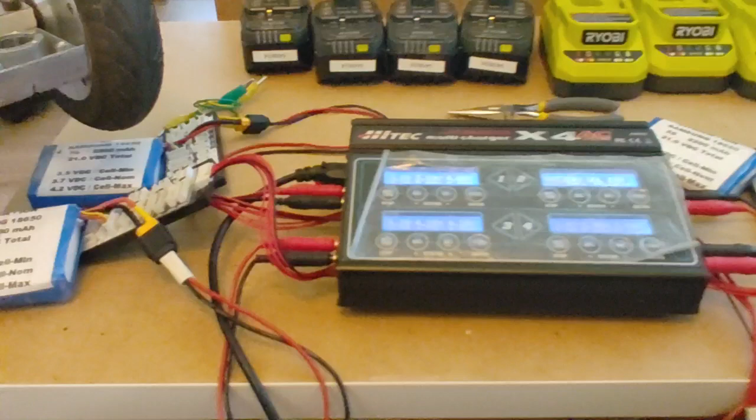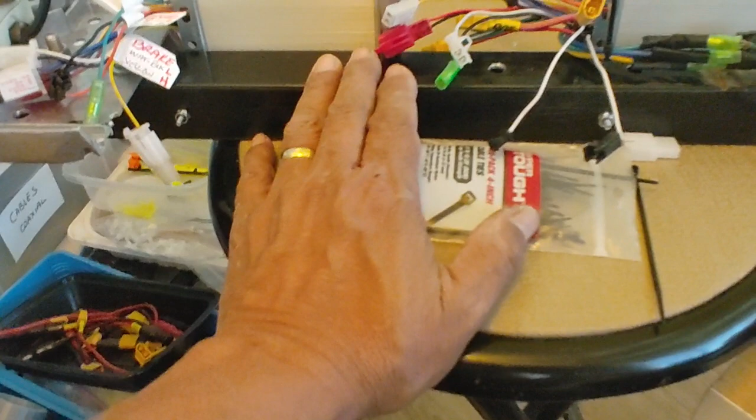And right now, what I'm doing is I'm working on this. Actually, this is what I want to talk about. I'm working on the drive system for this go kart that I've been working on lately. This go kart is made with this 1.5 inch square steel tubing. This is fence post material that you can buy at Home Depot.

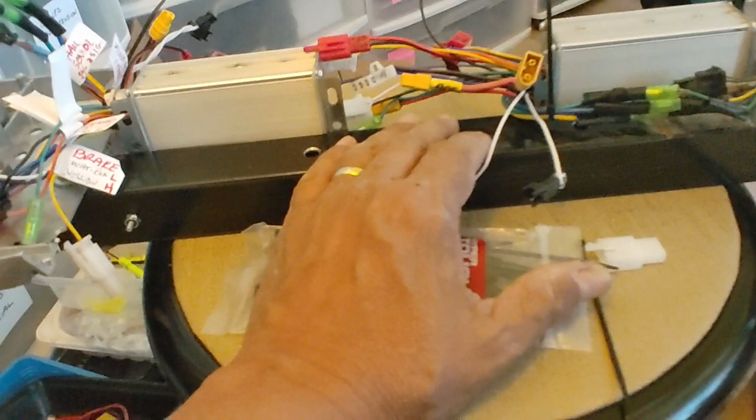But anyway, I mounted the controllers. These are brushless motor controllers, the same ones I had on the original go-kart that I made with the perforated telescopic steel tubing in the smaller version, kind of similar to this one here, but smaller. I did that, I don't know, 5 years ago maybe. Go look at those videos if you're interested in seeing what that looks like. They're all on my YouTube channel.

But I basically took the motors. They were joined together, very similar to that other one that's right there. That's another one. I do these things for fun, and so I buy these things inexpensively when I come across them, just to have them, so that when the creative juices kick in, I can build things like that. And here's another scooter right there.

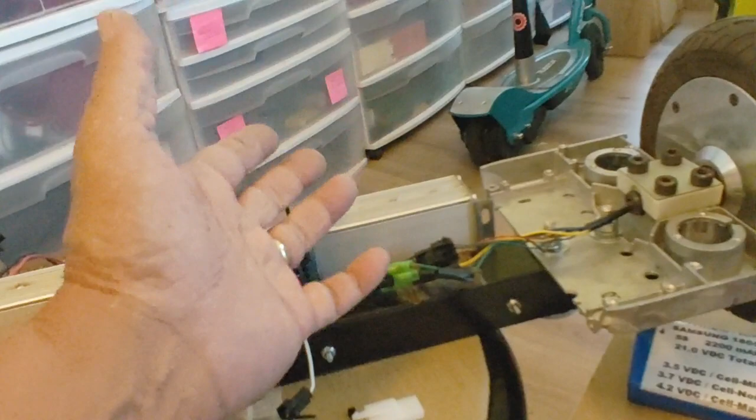And these are all things that I don't pay full price for, so that's why I have so many of these things, because there's so many people that get rid of these just because they can't charge the batteries, or they can't replace the batteries. It's more trouble to replace the batteries. You got to have the tools, and many people just don't care for that, and so they get rid of these things. It's a shame, and sometimes all it needs is just batteries, especially with these guys here.

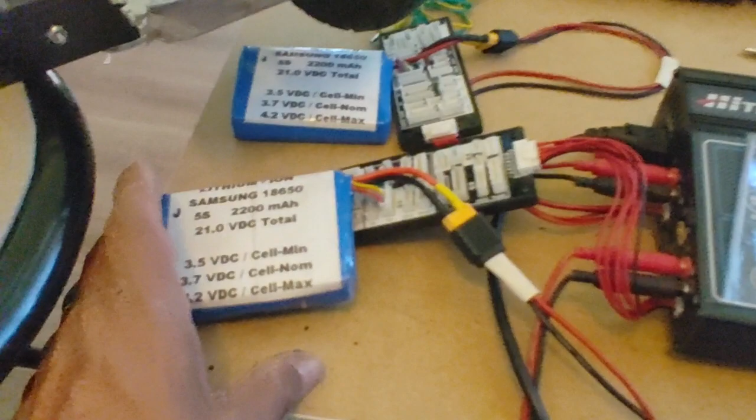These are a little more difficult because you got to get in the hoverboard, you got to take it apart, and you got to remove the batteries, and when those battery controllers go bad, you can still revive those batteries by charging them using a charger such as this one here. And I love this charger, by the way. And so I'm charging those batteries. That's exactly what I'm talking about.

These are batteries that came off these guys here, the hoverboards that I bought fairly inexpensive. I think I paid $10 for the cheapest one. And then when I brought it home, all I needed was to dismantle the battery pack, make my own battery pack, and charge them with a balancing connector, so that each cell gets charged individually.

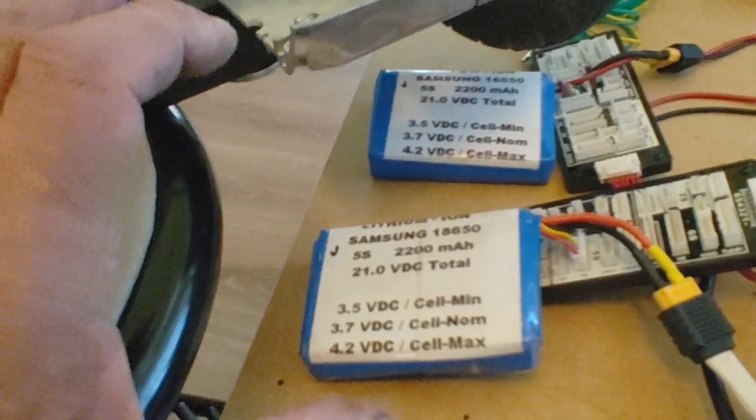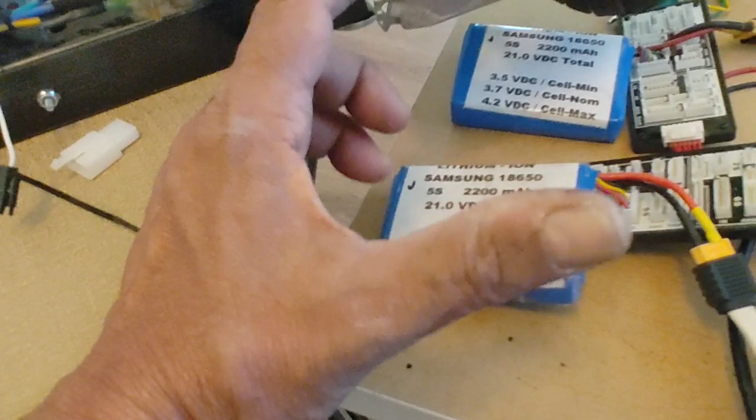I don't like the chargers that come with these packs right here. They give you the whole pack, and then they have one charger, an electronic circuit that fits on top. When those go bad, forget it. You're not going to be able to do anything. This is much better here, having a balancing lead or connector, so that each cell is charged independently. And this is where this comes in. A charger like this is excellent for doing this.

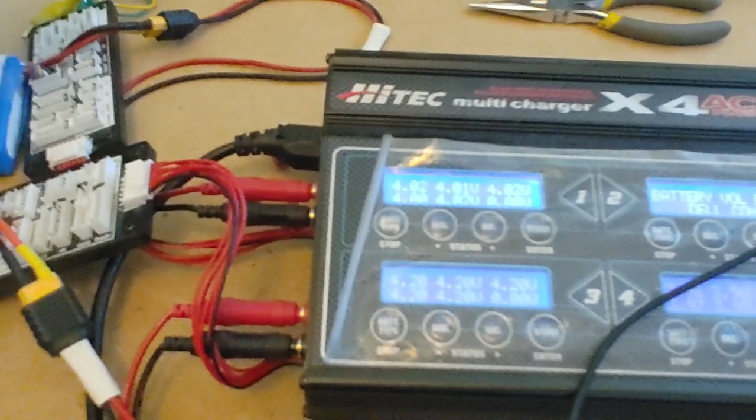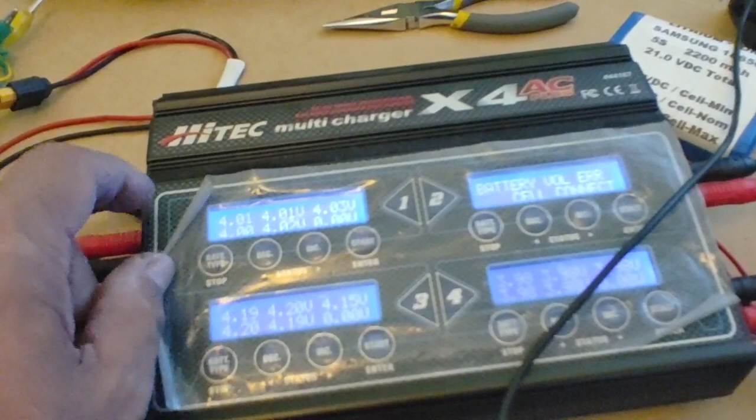This is basically just 4 chargers in one unit here, and it's all driven by AC current, which is really nice. Or you can use DC current if you use it at the field. Unfortunately I was trying to buy another one, but I did not find one of these for sale recently. Maybe I haven't looked hard enough, because people who buy these things tend to keep them, just like I did.

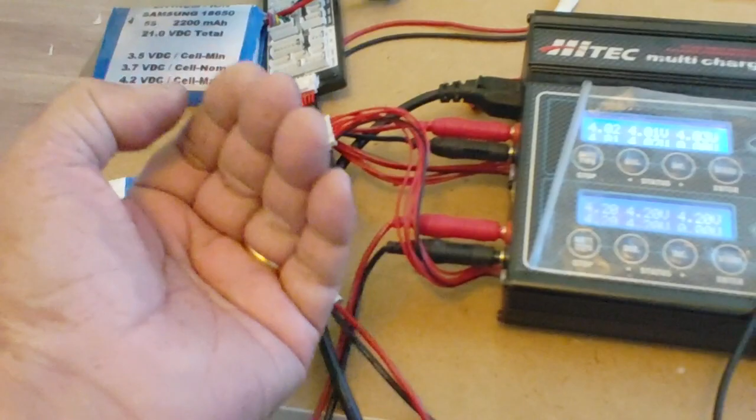This one went bad on me twice, because I did something stupid while I was charging a different type of battery, and I was kind of trying to get it started. And when you do that, there's a surge of current that happens when you're trying to revive. I think I was trying to revive a NiCad, or nickel metal hydride, and when I was doing that using this channel right here, I blew the MOSFETs. But I went in there and I replaced the MOSFETs. It's not a big deal for me. I did reach out to the company. They wanted to charge me almost as much as a new charger.

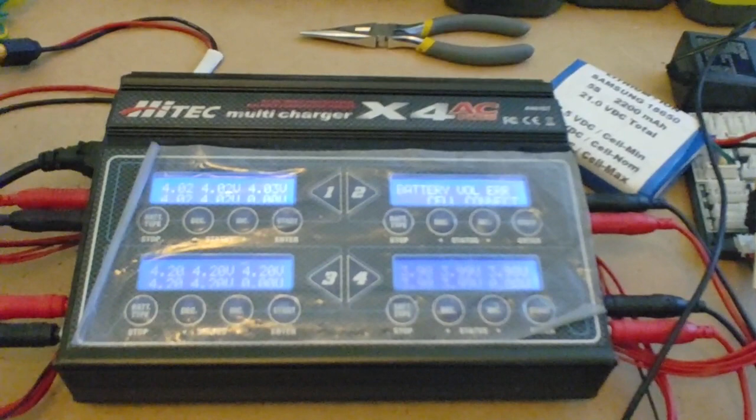It's typically the case when you try to send things to get them fixed. And that's why people throw away things, and then they buy new ones. It's a shame that we have that system. To this day, there's a lot of waste.

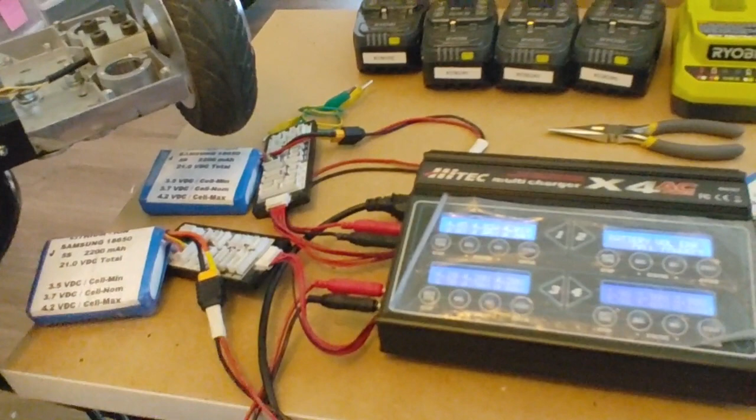And I, you know, I dislike wasting things. That's the reason why I also buy these things, to make projects like this, because I like to repurpose things. I like to recycle things. It just bothers me when I see so many things that could be reused, with a little knowledge and skill.

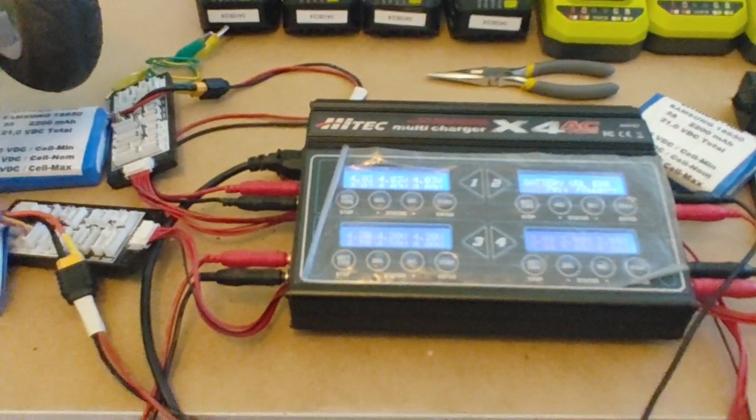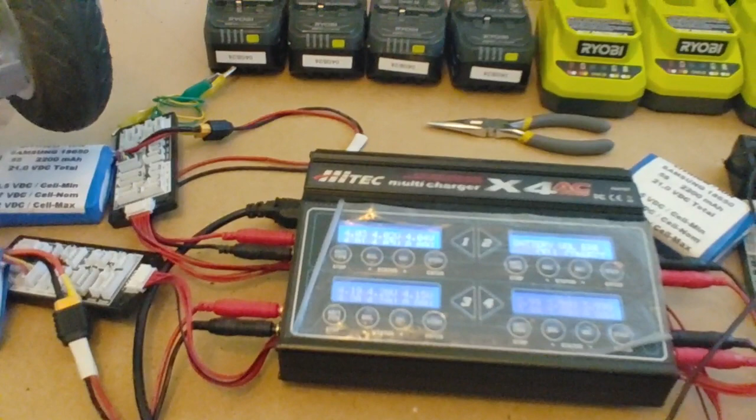Fortunately, I'm one of those people that can do a lot of these things by myself, with a little knowledge and skills, like I said. There are other people out there, and kudos if you're one of those people that likes to tinker and take things apart and repurpose things. I'm rooting for you, because I'm one of those. Anyway, so

this is the assembly. Like I said, I took apart my original go-kart with the telescopic tubing. I separated this. Actually, I cut this on my bandsaw, and I separated these so that it retains just the mounting point here. Now I could have gone with cuts like this and like this just to remove this extra material here, but I didn't want to do that.

I'm gonna have to think about that and see if I can still get away with that, because these things are bothering me. The fact that they stick out and they take away from the aesthetics of the whole cart. I'm trying to keep everything clean and aesthetically pleasing. So the reason I kept this piece like that is because I wanted to maintain the rigidity that this whole section provides, because of these extra walls it has. It's kind of like a framework to support this block right here.

If I were to remove this right here, let's see. The pressure points are right there, and at the bolts right here. So I may not need this. I may be able to just cut this off and keep it clean. The other reason I retained this is because it has these mounting posts here for the covers. I'm probably going to have to retain that, or maybe just cut around here and maintain that section for the mounting for the covers.

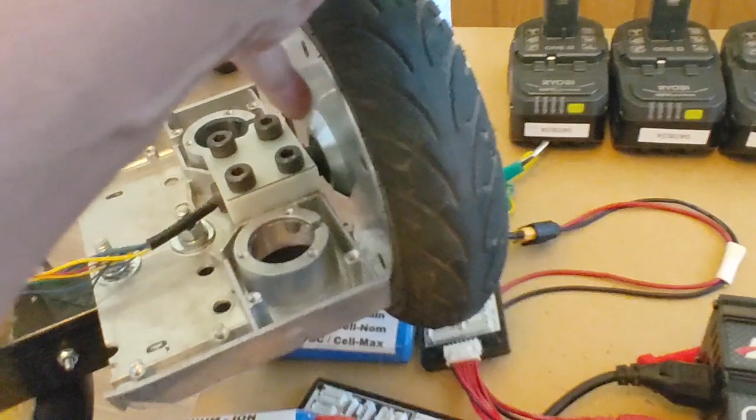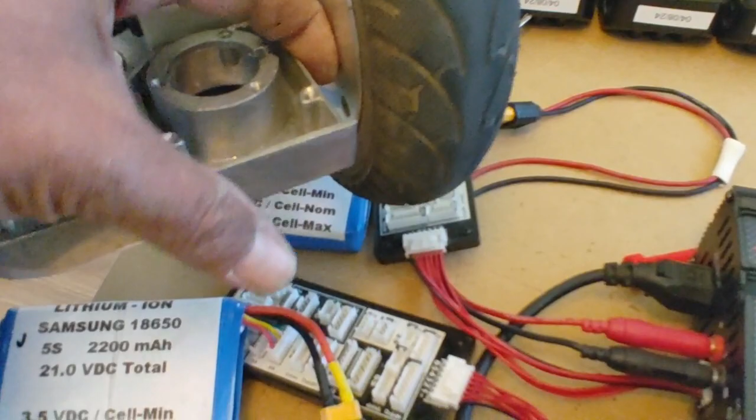So I also cleaned up the covers. I removed all the plastic except just a cover for the wheel, as a safety measure to prevent anybody from sticking their fingers in there, because that happened to me. On my first go-kart, it wasn't on, but I accidentally spun the wheel and caught my finger, and it hurt, and you can get seriously hurt if this is fully running. So that's the purpose of those covers, and that's why I kept this like this.

But I may come back and rethink this and maybe just cut away this extra section, because I'm not using this, and it's kind of ugly that these things are sticking out. I may reinforce the supports here a little further with some wider washers, to provide additional support, because when the weight of the person is here, most of the stress is going to be taken up by these two bolts right here in this plate. Not so much right here, but where this is mounting to.

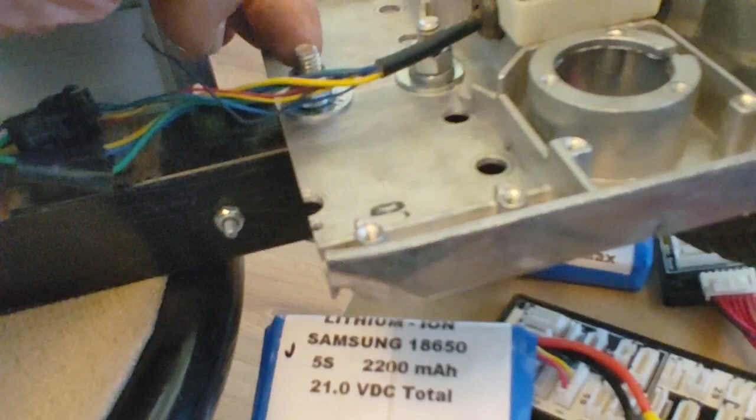Unfortunately, I couldn't mount four screws here, because this tubing is only 1.5 inches wide. I guess I could have done it with smaller bolts, but smaller bolts are really not going to buy any more than what these 5/16 bolts are doing here. So I'm just going to spread the load with washers, and I think that should allow me to cut this section right here and keep it nice and clean.

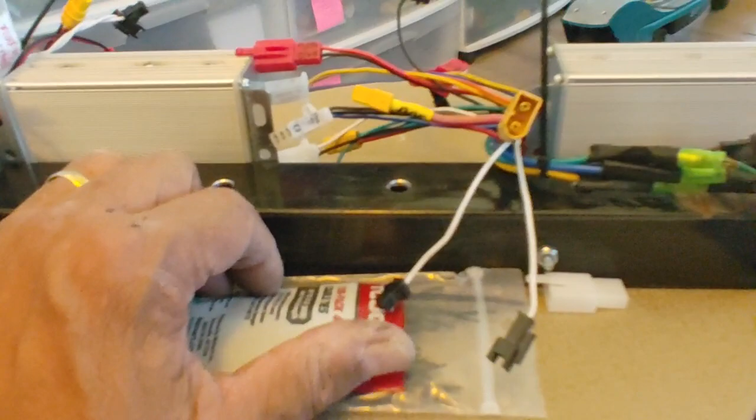Okay, so that's mechanical stuff, aesthetical stuff. Electronics controllers, they're still working just fine. There's so many wires here. When I first got these controllers, it was like, oh my god, this is like alien stuff, because there were no instructions, like, well, where do I go here, aside from the obvious, which are the motors, three leads here, and the sensor connectors, pretty much obvious, and the power, because of the thicker wires, and the key, the starter.

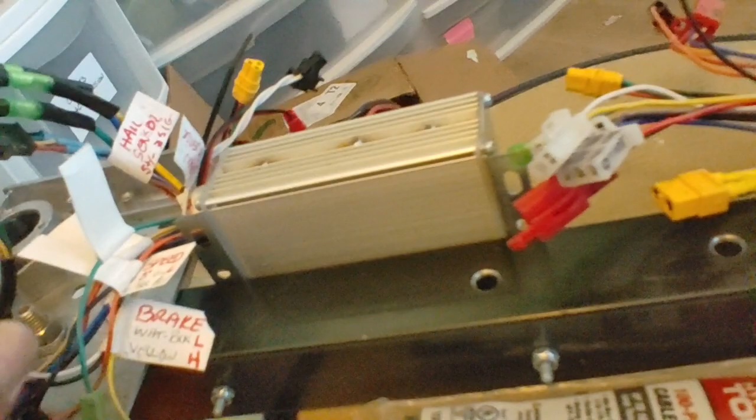But all these other connections, like, well, what is what here? So I did a drawing and I traced it, and that's why I have these tags here, which I'm going to take out once I get my schematic cleaned up a little bit. I may even put a schematic right here just so I can have the schematic on the unit itself.

I want to do that from the point of view that my dad used to work on electronics when I was growing up, and one of the reasons I went to school to learn electronics is because of my dad. I think subconsciously that was in my mind, because my dad was always repairing electronic stuff. Back in those days, they used vacuum tubes, and I remember my dad used to go buy parts from Radio Shack, I think it was Radio Shack.

They used to have a tester, these boxy looking machines or stands where you could go and test all these tubes, and that's how you tested your tubes, and that's how you bought tubes. So it was an interesting time to be around. And I grew up looking at my dad do all that type of work, repairing things.

A good portion of the equipment that my dad worked on, mostly radios and washing machines, stuff like that, had the schematic pasted on the inside of the device itself, and so it was great because you have the schematic, you have the map there, which is the way these things should be. These controllers should have a map.

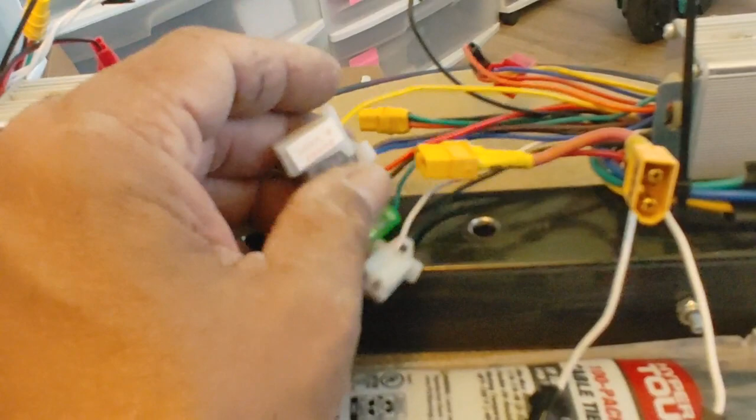Chinese is very hard to make some sense out of, because it doesn't use regular letters. It's more symbology, the way Chinese is written. So what I'm trying to say is, if it was in French or Italian or even German, you could still make out some of the words, because they're all derived from Latin. But Chinese is a different world. But I managed to decipher all the stuff, and I have markings right here. All the markings are there, but I also did it on this one over here.

So that's one of the things I am going to do. The schematic, I'm going to put it right here, so I have that. I'll probably laminate it so it doesn't get ruined with water, or not so much water, because I don't run these things when it's raining, or leave this outside when it's wet, just to protect the project, the go-kart. So that's one of the things I'm going to do.

What I'm doing this time is I'm making all this cleaner. When I did my first go-kart, I was more concerned with getting it running than tidying it up and making it really clean. And so some of these connectors, the way I did it, for example, where's that connector? For example, my throttle control and key, which is the on-off switch. I did it like this. This one is the key, and this one is the throttle control.

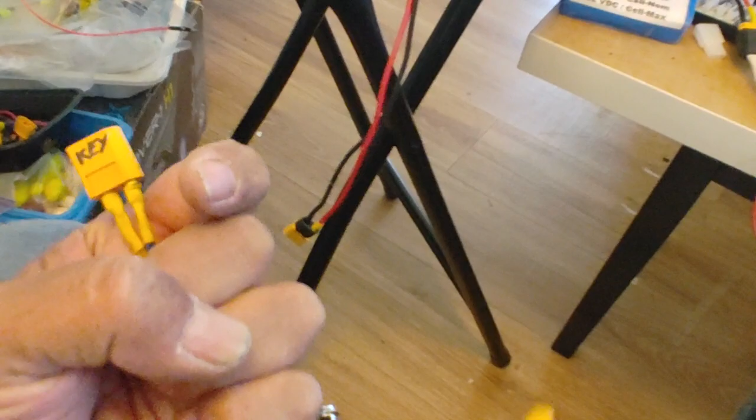So I did two of these that are attached in kind of a Y setup right here. What I should have done here is just have one of these here, one for the key, and one for the throttle, right?

And then the throttle from both of these should be parallel together, so that I can feed the signals to both of them at the same time. I do have the same setup here, but I put the Y right here, and so this I'm going to clean up. I'm going to just have one here and do that Y on this one right here, so both are parallel, and then they have one connector that matches with this one here. So that's what I'm doing with not just the throttle.

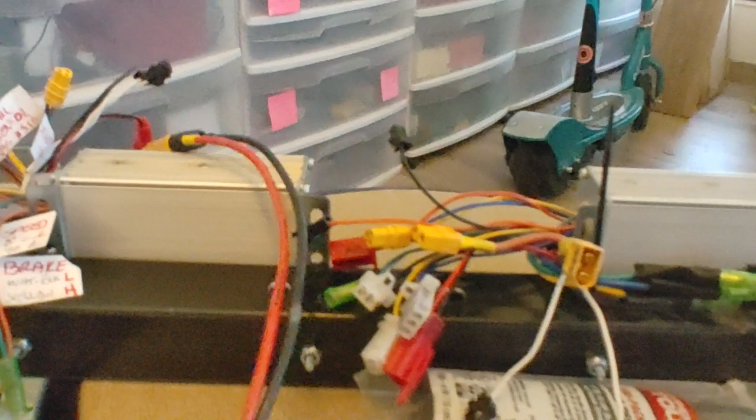The other thing this doesn't have is fusing. So I'm going to introduce fusing, and I'm going to just clean up, like I was saying, some of these. I'm going to make a harness for all these things. There's so many different connectors here. These should all be similar connectors, like these connectors that I use. That's the reason why I was using these as well. These three-prong connectors, just to keep everything kind of matching, similar to this.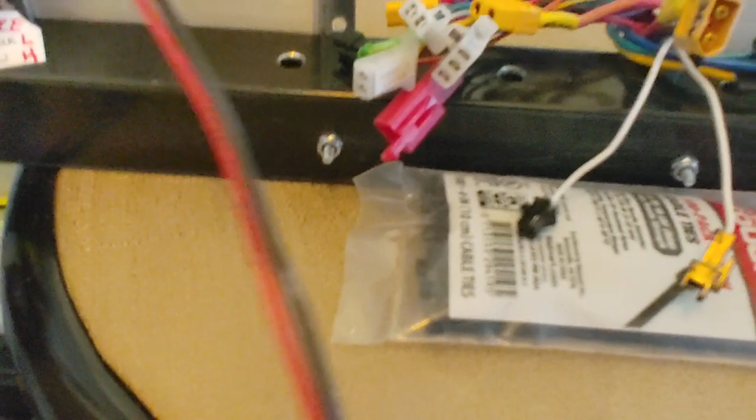There's no reason to go with all these. I mean, they could have done it with all these connectors like that. Pretty much everything. I guess it's done that way, but they're different colors, I guess. With a schematic, you don't need colors. You just need a connector in plain nylon white. That would have been a lot cleaner. Okay, so

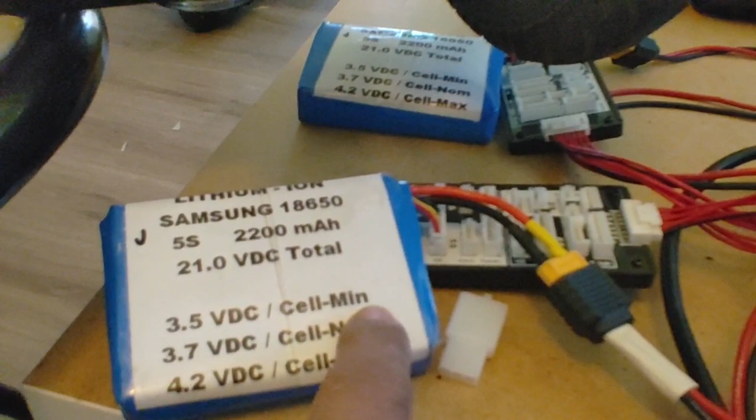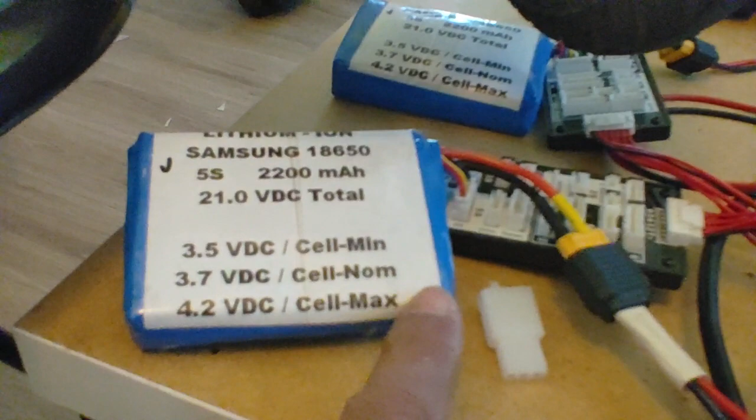this video is about this, and I'll talk a little bit about the batteries that I'm using right here. These are the original batteries that I used on my original go-kart, the one that I did with the telescopic perforated tubing, and I'm recharging these. I have 3 of these. One of these went bad. One of the cells went bad, so I have to take it apart and redo these things. But I do have some other packs in the works and in assembly, and these come from these guys right here. They're just pulled out, ripped apart, and individually reassembled as 5S packs, which make up a total of 21 volts.

I could go to 6 cells here. This charger will do six cells. See, this is doing 5, but it has up to 6 cells, and I can increase the voltage here, but that's going to increase the voltage to 24. Right now I'm running this fully charged at about 40. Let me see, what's my voltage here? I wrote it down here. 21 volts total.

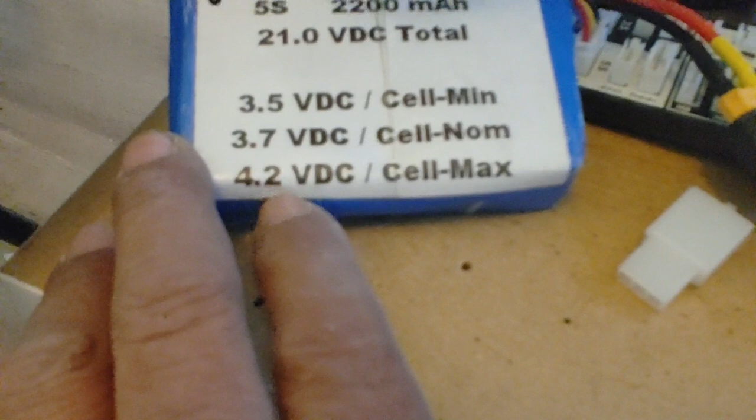Okay, so the nominal voltage is 3.7, of course, because these are lithium ions. Cell max is 4.2 volts. So at 4.2 volts times 5, that's about 21. Yeah, I'm running at about 40 volts in series, because I use these in series. And the reason I made 4 is that I was going to use 2 in series and 2 in parallel, just to double up on

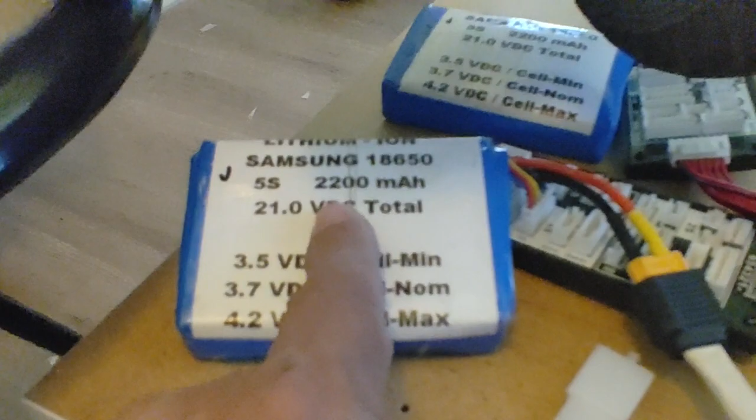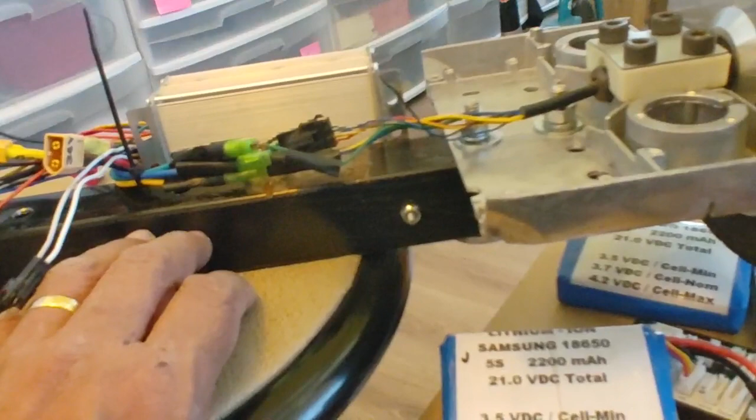the current rating, which right now is 2200 milliamps, which is 2.2 amps, is what these provide. With 2 of them in parallel, that gives me 4.4 amps. 4.4 amps on the original go-kart was going to give me a good 20, maybe 30-minute runtime. With 2 of these, it just gives me about 15-minute runtime, and that's at the 2.2 amp capacity. At twice that much, it doubles the running time. So that's the way I did this.

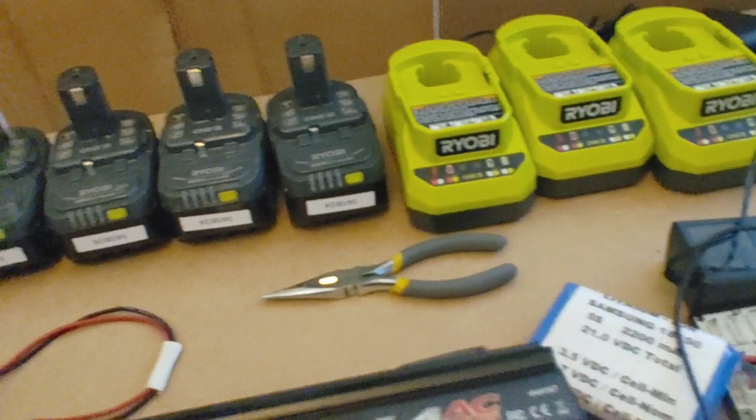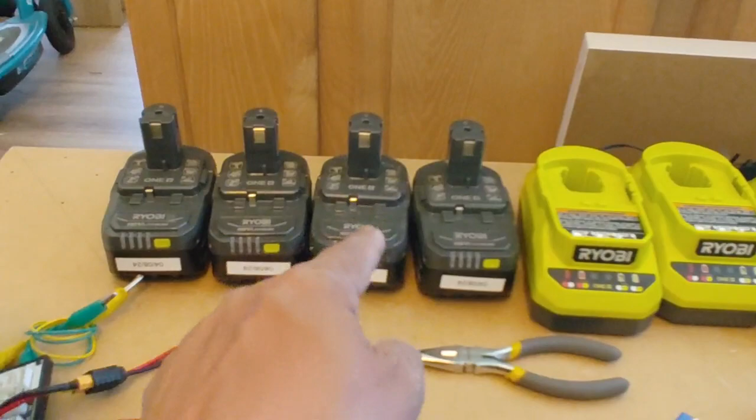I also have these Ryobis that you see here that I've been charging, that I use on those. I don't have that scooter with me, but I do have one that's adapted with the sockets to use these batteries. My racing go-kart that I did with the EMT tubing and maker pipe connectors, that one has those batteries that I run. 2 of those 18 volt Ryobis, 36 volts.

This runs a little more power at 42 volts, in series, delivering to each one of these controllers. I think these are rated at 36. Let me see. They do have markings here on these controllers, and I really like the way they laser cut the markings there. This has 36 to 48 volts, so yeah, it is able to handle 48 volts maximum.

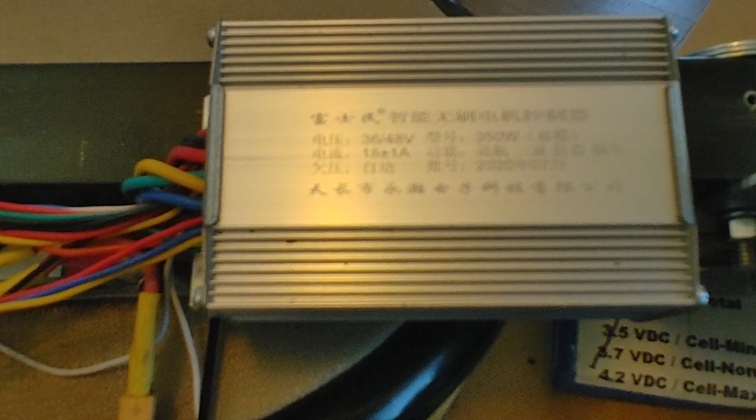18 plus minus 1 amp, 350 watts. So 350 watts per channel, or per motor. That's 350 watts times 2. That's 700 watts, which is plenty to push... I'm about 180 pounds, so it pushes my weight. And I've had people that are heavier than me sit on the original go-kart that I did with these scooter wheels, or hoverboard motors, and it pushes that weight just fine.

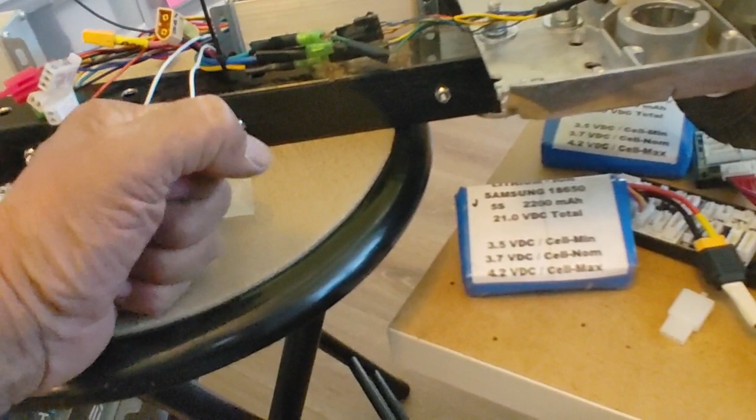700 watts. 1,000 watts would be better for my electric go-kart, the racing one. That one uses the same motors again. That one could use 2,000 watts because it's just a heavier frame, and so it's moving more, not just the pilot weight, but the mass of the structure, the go-kart. So on that one, I'm a little bit underpowered, I noticed, but it moves you around. If you're on flat terrain, you have no problem. It's just going up a little hill, it has a little hard time. This one doesn't have so much of a hard time moving uphill with a lighter airframe.

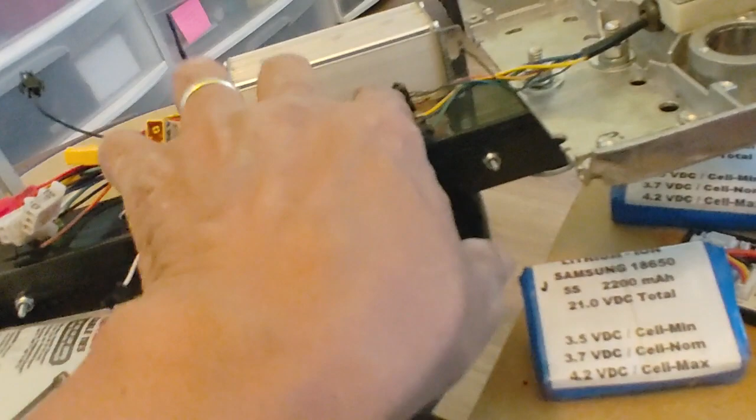But it's 700 watts. It's what I'm delivering here, what I'm using with these motors. I could gear this, but that introduces more mechanical complexity, and so I don't want to do that. I just want to keep it direct drive. And these things did not cost me more than, like I said, I think I paid for this particular one, the hoverboard, $10. And all I had to do is just gut out all the original electronics.

I could have used those, but it's a lot easier to buy these controllers. These are like $25-$30. Buy two of these controllers and just reconnect everything the way you see it, and it looks clean. And if one of these goes bad, you just pull that out, put a new one there, you're done. You don't have to mess with the electronics that are kind of on that one.

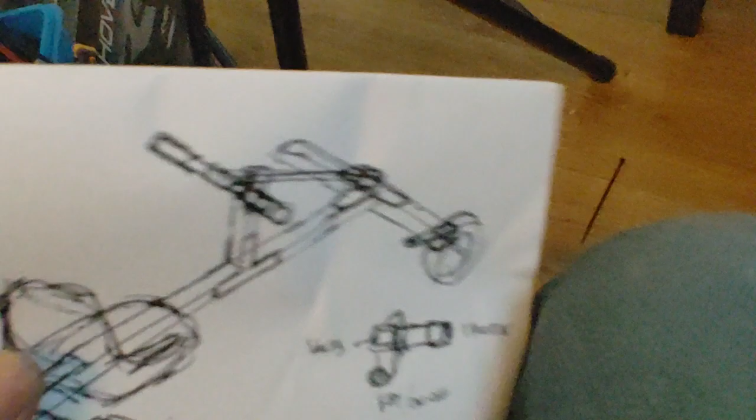I'm not high enough with my camera because I'm charging it as I'm filming. But so that's what I'm working on. Okay, so getting back to this is what I was trying to get at. Where's my pen? Where is my pen? What happened to my pen?

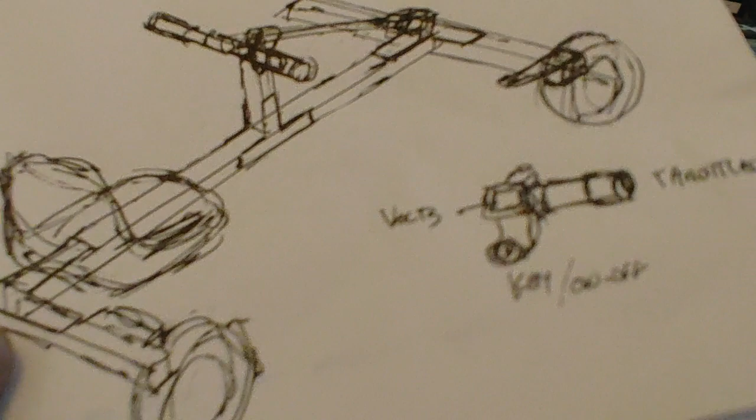Okay. So here's my go-kart, this one right here, the one with a 1.5 inch steel square tubing. I was going to do just a regular round steering wheel, but I decided to keep it the same as I did with my perforated steel frame go-kart, so that it allows me to put the throttle right there, directly on the handlebar. Your hands are fixed there, the way that your hands should be, nice and straight and level. And you have the throttle right there, like scooters are done. And so I'm going to keep it as simple as that.

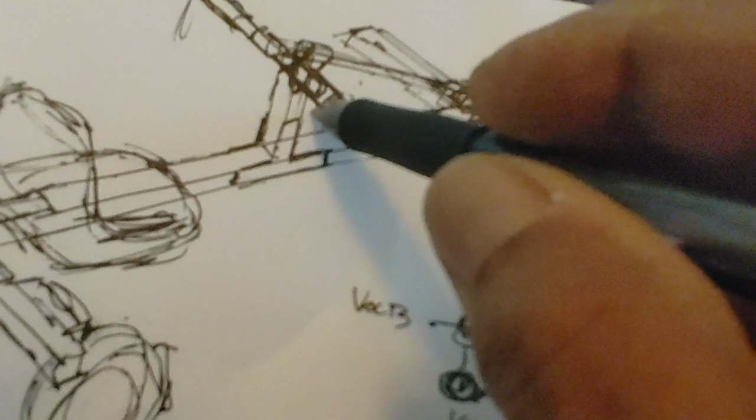So that throttle will be on this side right here. It'll go through the harness to the back. There are the controllers right there. The batteries will probably sit right here in the back, or I may bring the batteries to the front here, depending where my CG is going to be located at. So I have to figure out with my weight here, and this seat is relocatable, meaning it's adjustable in distance from here to the feet.

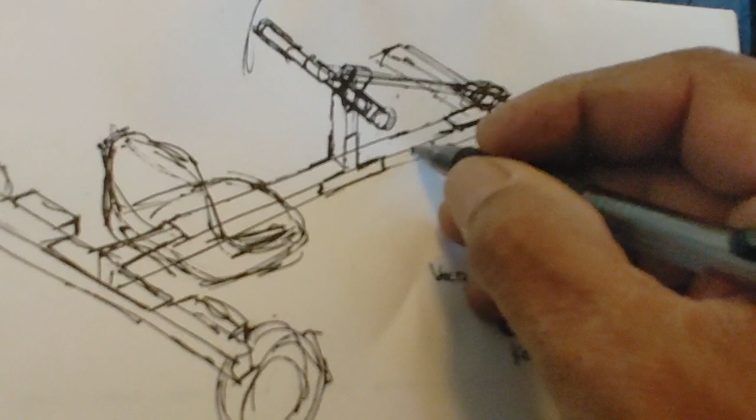My feet are going to have these also out of this tubing here. I already did that yesterday. I created these parts right here. I just need to find a way to attach them so that my feet can rest here. That's my foot right there. So my feet can rest here, and that way it's not in line with my steering rods here. So that'll be attached there, and so depending where the CG is, what they call center of gravity, I like to call it center of mass.

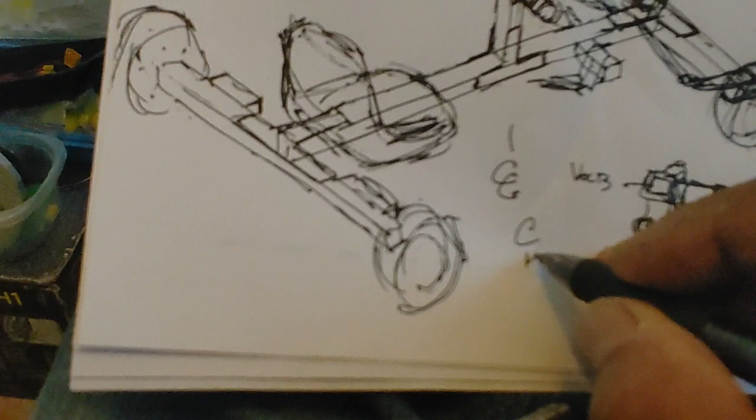And that's another topic for another day. I'm not going to get into too much of that. I'm just using CG because everybody's familiar with that. Depending where that comes out, I have to find out. I have to put this on the scale and put my weight there and figure out where the center is, center of mass. And depending where that is located, I will put my batteries. These batteries are about, I think maybe 5 pounds, for all four of them.

If I can get away with putting them here, as I used to have it on my original go-kart, the one with the perforated structure, I used to have everything in the back. That should work just fine. But this one, because it's got a little more mass than that one at the front, I think I may be able to get away with the batteries in the back. But if not, I'll bring them to the front right here. Just make some kind of a plate.

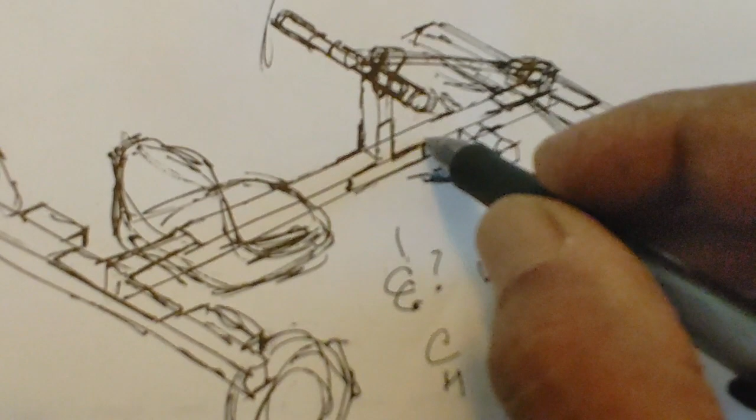Okay, so what I need here at the front is I already have the key, the on-off switch. So that's there already. The throttle's there already. Okay, so what else do I need here? I'm gonna write down the things that I need here. I need on and off, which I already have on the throttle control. On off, and then I have throttle. And then I also need brakes, which is very important here. Brakes. And I need reverse.

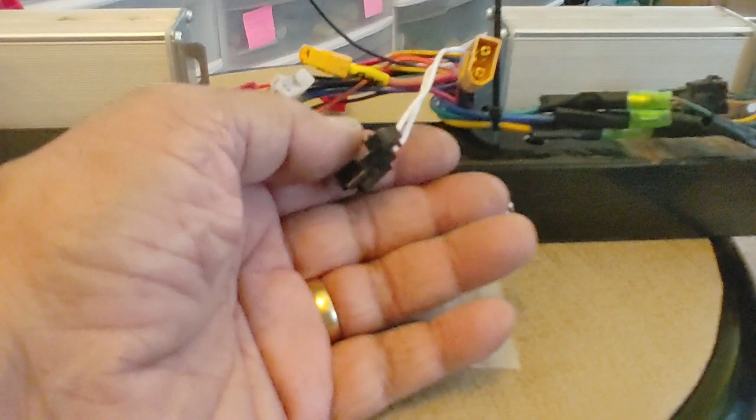All those things are available through these connectors here. This right here is the reverse line. When you touch these two wires, and all you need is just a switch, for forward and reverse or neutral, they rotate the motors the opposite way. So that's reverse right there. This right here is a speed control. This is for just regular high and low.

There's not very much change that happens with the high and low. I have to test this and see if there's any torque advantage or disadvantage when I go to low and high throttle here. I did notice that the motors do spin a little bit higher when I connect it to the high section here, and all you're doing is just grounding one of those leads, the high or low, to ground, and that establishes your speed control, from high to low. So that's speed control.

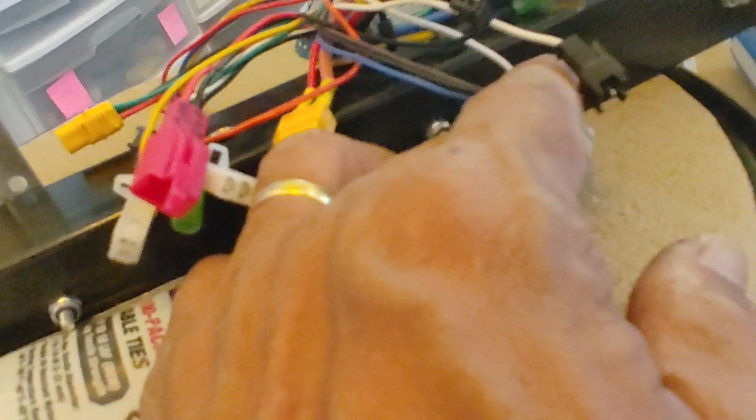And then of course, that's the key. That's the motor, battery. These are power leads right here, 48 volts, if you want to supply power to lights or horns or whatever. So it's nice to have additional power. I don't know what this green one is for. I have not figured that out. It's not important at this point. This one is also another power lead.

This one says system ground on this one, but on this one, which is the same wire, says brake high. So you'll see that I have that same yellow wire right there. It's just with this connector here. This one is supposed to be right there as well, just the matching to that. Okay, so the yellow is the same as this one, but on this one it said brake yellow is for high, brake high, and this one's low.

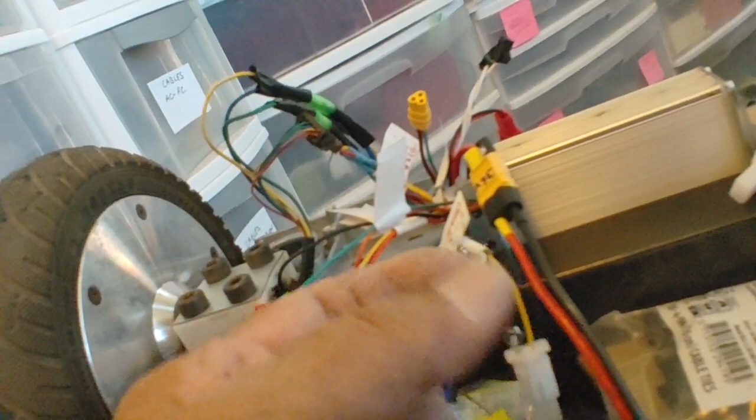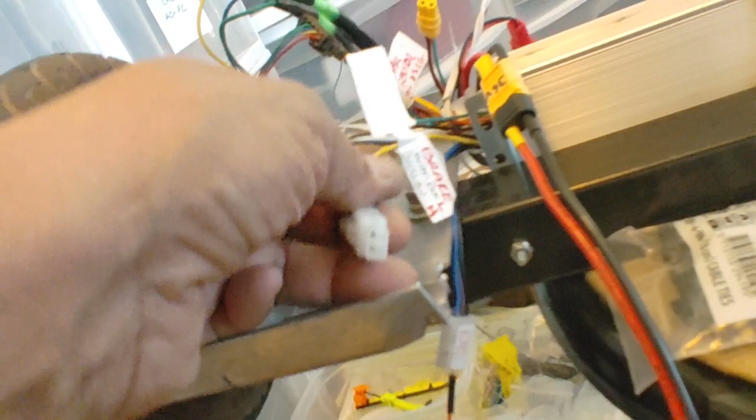I already tested this. This is like a low braking, electronic braking that happens when you ground this white wire. You're just making a short between those two leads. Just another switch. When you turn that on, it slows down the wheels. I think this basically just cuts the power. I don't know how this works. The yellow one, I tried grounding this, and it didn't do much. So I don't know how they are supposed to engage this.

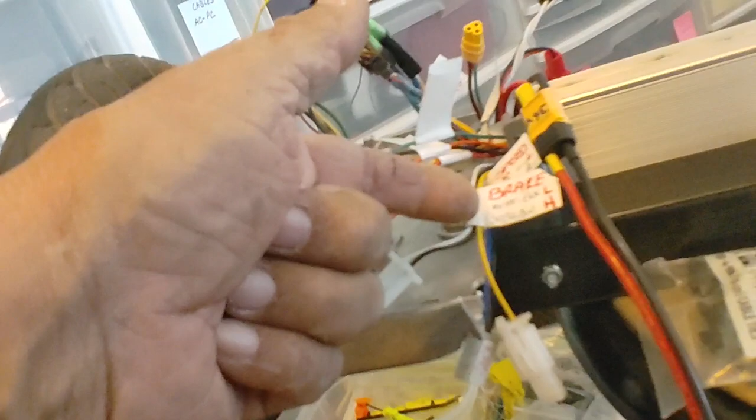So for the high braking, what does that mean? Is it going to stop? Does it put a lock completely here, or does it slow down with a much faster rate than the low brake? So I have to figure that out. All these other wires. What is this green one here? This green one does not have any markings. That's what I was saying on this other one as well. I don't know what that green one is.

This right here is my cruise control. I have this one on here because I was playing with this last night. When this is engaged, it's a cruise control. Basically, just like on a regular car, you have that switch, cruise control, and then you don't have to do the throttle. So that could be another switch.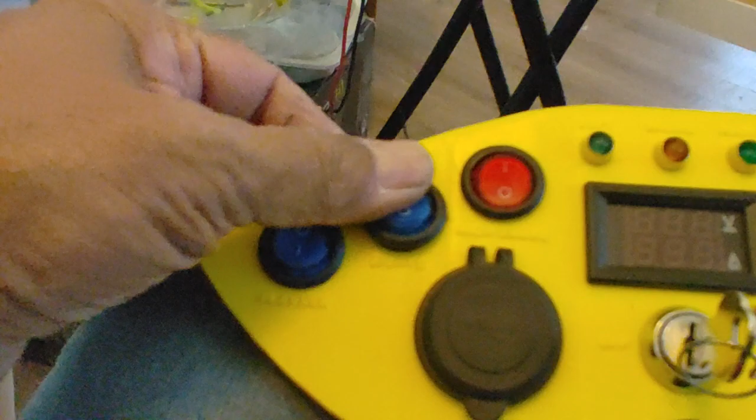And by the way, all this stuff was done for this panel right here, you know, with all these things in mind that I'm talking about, that's how I did this panel. You know, it's got reverse, medium, high, low speed, low brake, high brake, left brake, right signals, lights, flashers, cruise control, reverse. So all that's done in this panel right here, and this is what I'm trying to do with this one here as well.

But I don't want to make a panel like this. This is for my racing go-kart. You know, the on-off switch, so it doesn't use the throttle. It uses a regular switch, and then the throttle was going to be my pedal. My brake was going to be another pedal connected also in parallel with one of these switches here, the brake high and low, so that I can either brake it with my foot, or just activate it with the switch on the front panel. This is for my racing go-kart, done with the EMT tubing and maker pipe connectors.

But on this one here, I just want to keep it a nice little panel, kind of short, very compact, with the necessary stuff. So on-off. Okay, so that's on my throttle, like I was saying. So that one's there. That one's there. I need brakes, so that's going to be a switch for brakes. So switch 1. Reverse is going to be another switch. So switch 2.

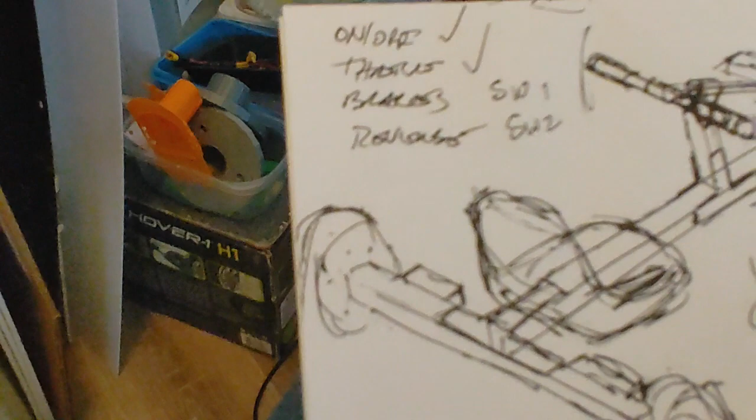Cruise control, I'm not gonna bother with cruise control, because you want the throttle all the time there. I want to be able to control that, not just for me but for other people. Cruise control can get you in trouble if that just engages and does not want to release. Brakes, switch 1. So yeah, brakes, switch, reverse.

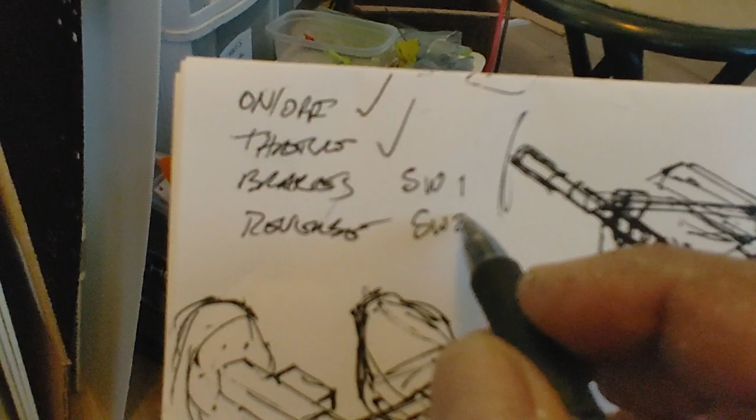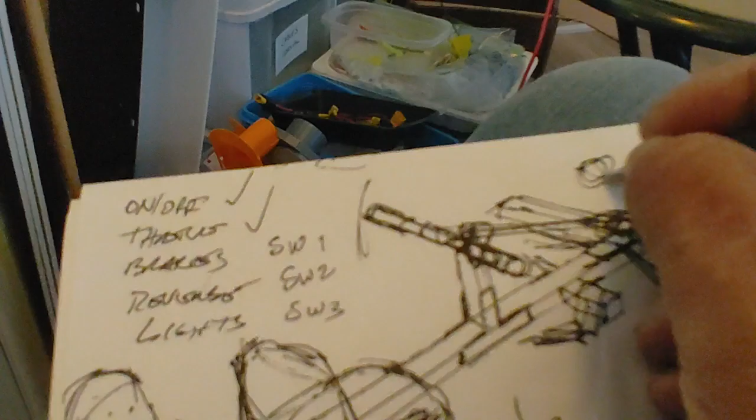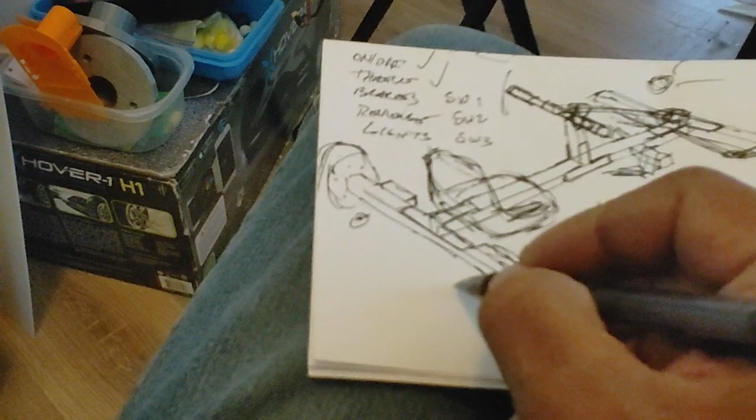Okay, and lights. I want to have some lights here for night riding. So the lights are going to be another switch here, switch 3. Real simple. These lights for night driving will be front lights. This will have some front LEDs here. I'm just going to draw some circles here. So front lights, and then rear lights here. So some rear lights. So this is rear lights and front lights.

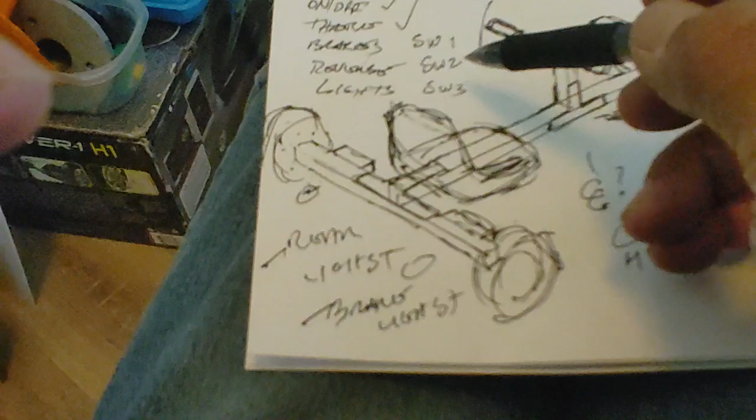Now I can get really elaborate here and tie these lights to the brake, and also have brake lights here. So rear lights and maybe brake lights. That'll look cool. So this is 2 things right here, and this is just a set of high intensity lights for looking where you're driving through. These brake lights can be tied with a switch here. So every time you activate the switch, the lights go on. Real simple, easy stuff.

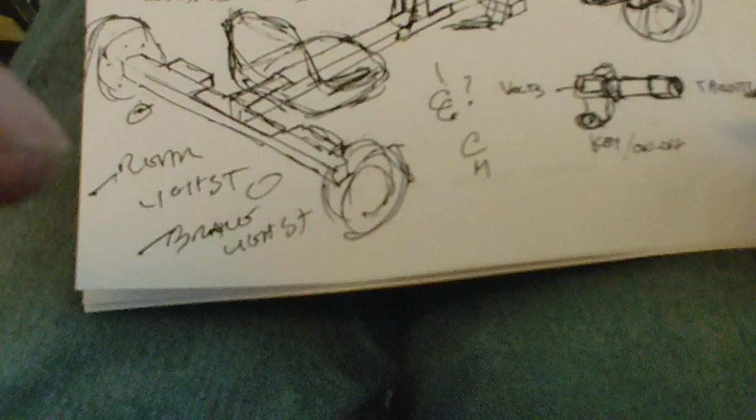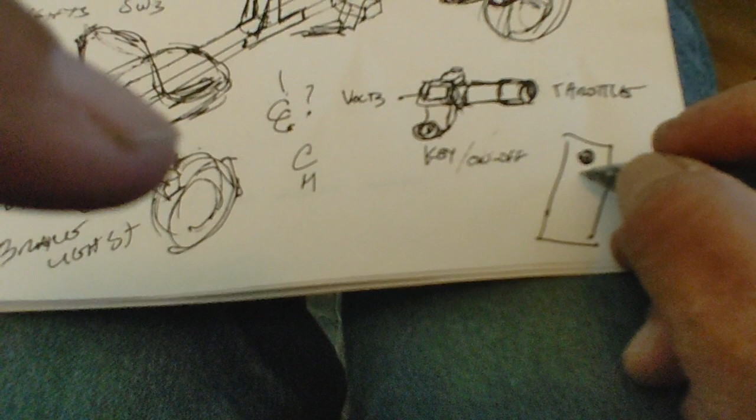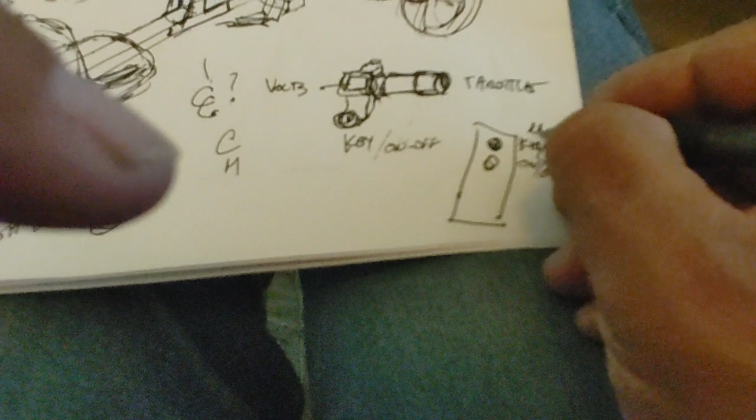So that will probably have to be on some kind of a panel here, just an angle panel. I think I'm going to do a little angle panel here. I'm going to have to do this again with a key, just in case I don't want to use this key right here. I want to just operate it as a regular go-kart and not like a scooter. So I'm going to put the key and the on-off switch. On-off. This is key. So this would be the main power here. So main power, on-off switch.

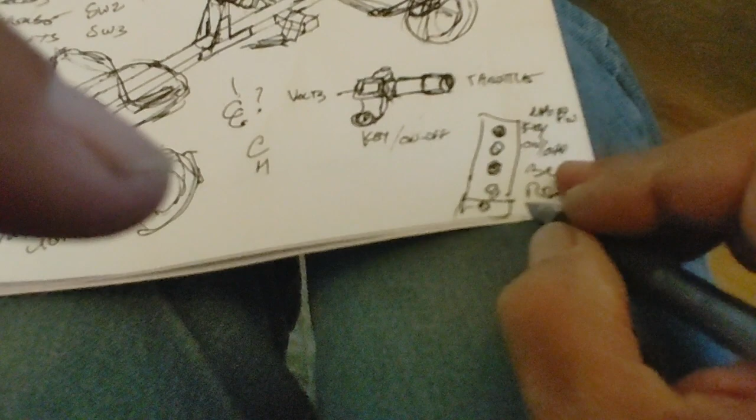I want to engage the brakes, but I also want to have the ability to engage a brake with a foot pedal. That can be done in parallel with this switch. I do want to have a reverse, and I do want to have lights here. So reverse, brakes, and lights, and there you have it. That'll be my quick and dirty sketch here, but that's what's in my mind right now as far as doing this while I'm working on this thing right here.

Anyway, this is where I'm at. You know, this is how I like enjoying my retirement days.